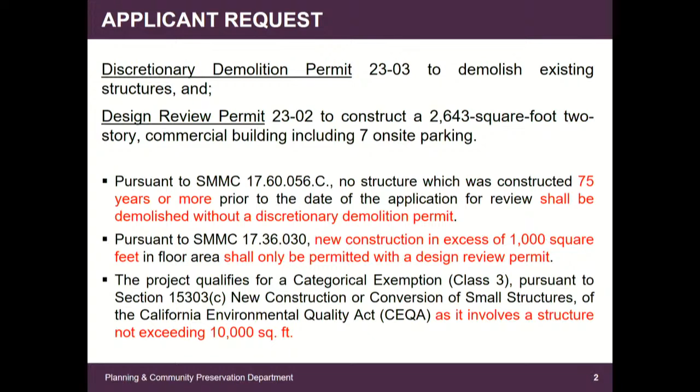The applicant is requesting a discretionary demolition permit, which is required by Sierra Madre Municipal Code for any building that's 75 years of age or more, and so we are processing that discretionary demolition permit. They're also applying for a design review permit, which is also required for any new construction in excess of 1,000 square feet. And the project is also categorically exempt from CEQA, as it involves a structure not exceeding 10,000 square feet in size.

The property is zoned commercial as well as its land use designation. Fairly small lot, 7,500 square feet, built in 1933. The building is 90 years of age, and we required a historic resources report to be prepared.

Under criterion B, architecture, it is not eligible for designation. It's not a significant building. Under criterion A, which is historic, it is eligible for designation.

In the conditions of approval, we are requesting that a plaque be placed at the project site and the historic resources report placed in the library archives. The reason it's culturally significant is its association with Dr. William Groth, who was one of the first physicians in Sierra Madre and actually opened up the first hospital in Sierra Madre, just north of the site.

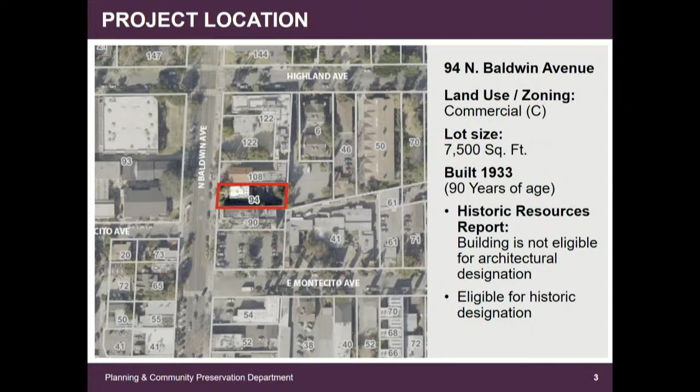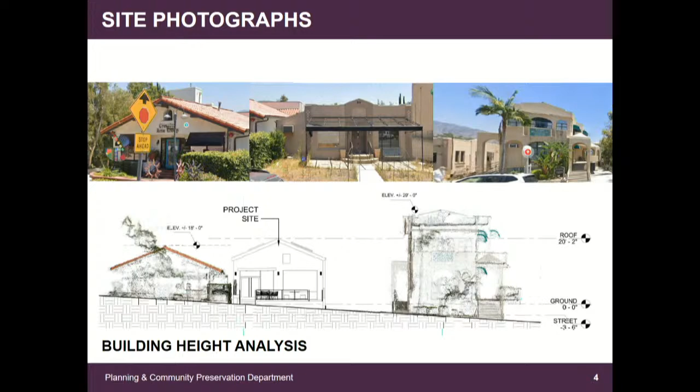Again, looking at neighborhood proximity, we have the Bethany Church and the school across the street. At the corner of Baldwin Avenue and East Highland Avenue is the Frontier communication structure. And then immediately to the south of the project, again, that two-story commercial building.

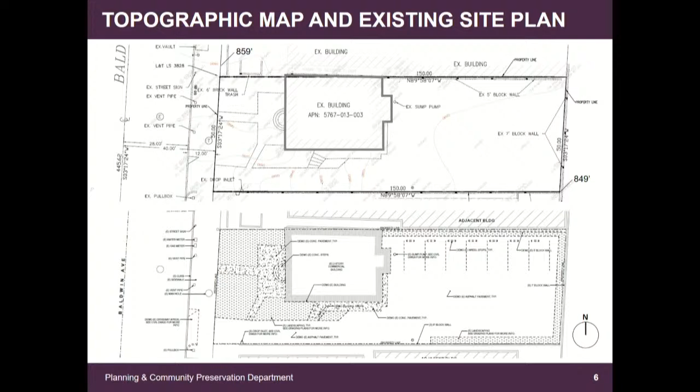We are looking at a topographic map of the existing site, which will be demolished in its entirety, and reconfiguration of the parking lot, which provides 7 parking spaces.

The broad project data identifies the various zoning requirements, and it meets code in its entirety, including lot size, really with no change. Lot coverage increased slightly by 8% to 39%. The code does allow lot coverage at 80%. The floor area, comparing the old building to the new, increased slightly at 287 square feet - so minimal increase in size.

Setbacks: the front setback increased slightly to accommodate outdoor patio dining at the street front. To the north side, it's built to the property line as was existing. To the south, it increased slightly to 21 feet, largely to accommodate the requirement for fire access of that driveway, a 20-foot minimum requirement. The rear setback went from 74 feet to 15 feet, which is still code compliant, and they're providing the required 7 parking spaces, including 1 handicap accessible space.

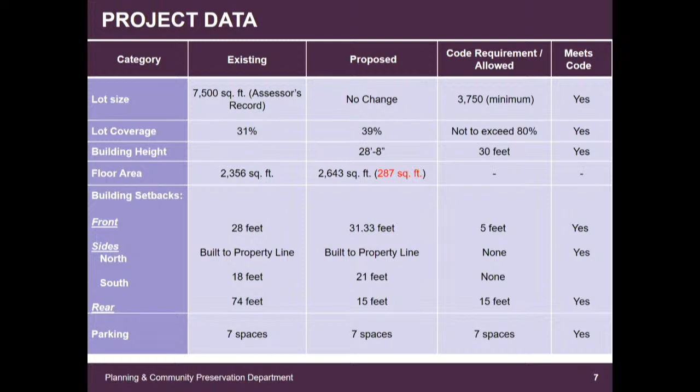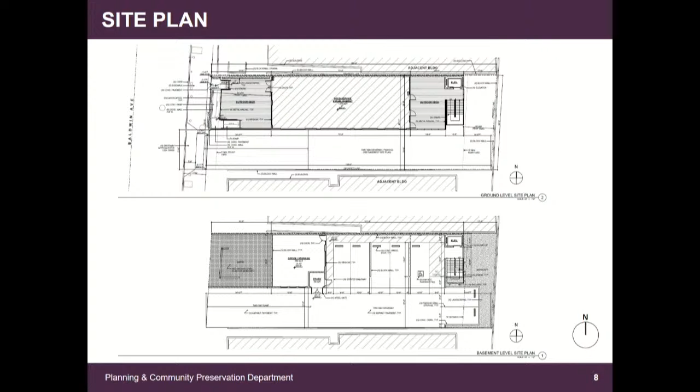You see the handicap accessible space right here, and the path of travel and the elevator. And there you see the 20-foot wide driveway. There's also a small program of basement and storage space underneath the building.

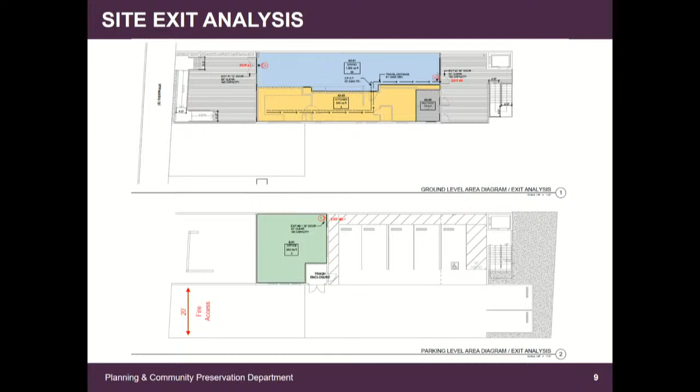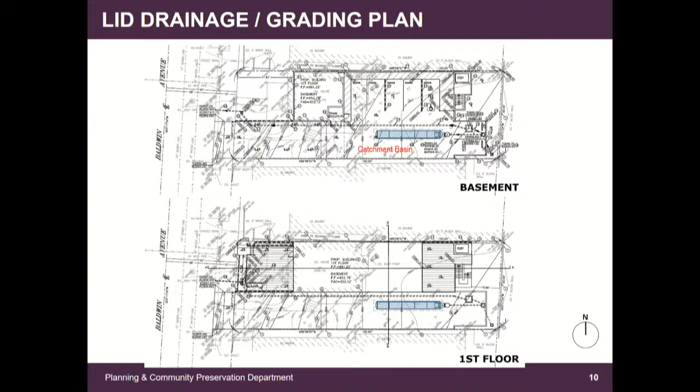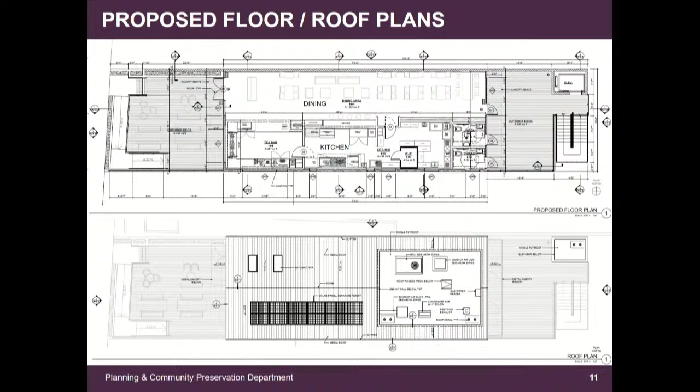The floor plan and roof plan. The floor plan on top shows the outdoor spaces, front and rear, and the interior program, which has seating and dining opportunities across the north side of the building. There are skylights, as you can see in the roof plan, and solar panels. The kitchen program is all located to the south of the building footprint.

Street facing elevation, or the west elevation, as shown, and its proximity to the adjacent buildings. Similar style in reference to the gable roof, the outdoor patio and access ramp that leads into the building.

And then on the north facing, here's a street front. So this is the south facing elevation, the driveway, and that's a container area for the trash receptacles, which closes with gates. And then these are the parking spaces below the building, and alongside here you see the stairs accessing the rear deck.

AC equipment, mechanical equipment is concealed behind the gable roof and this parapet gable to conceal a lot of the mechanical equipment in that location.

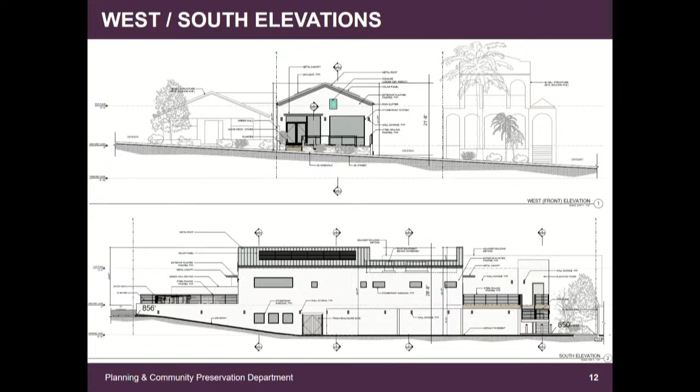The east elevation showing the access ramp up to the deck, and then the north elevation adjacent to the Creative Arts Building. Again, we're looking at street front here, and all the way back here is the rear deck.

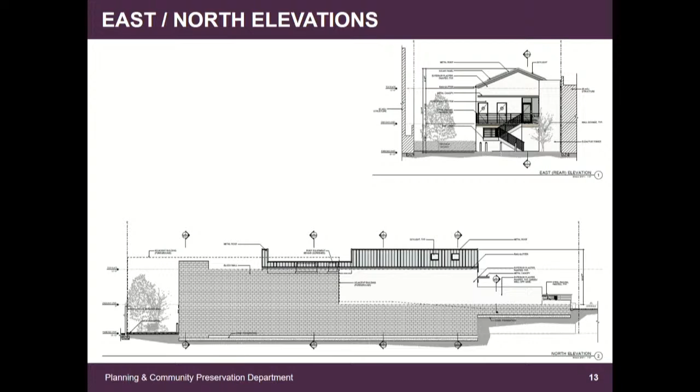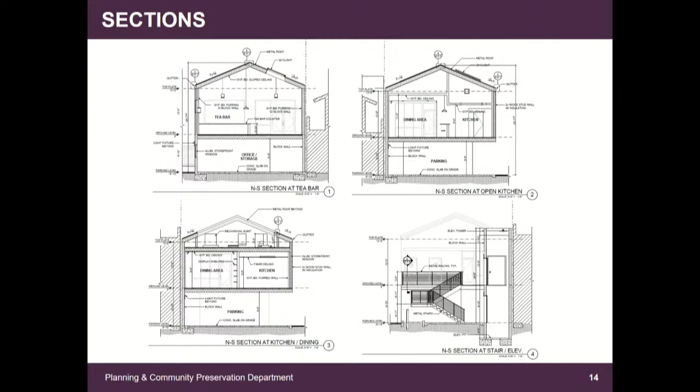Sections of the project, and longitudinal sections. Again, looking at street elevation to rear elevation.

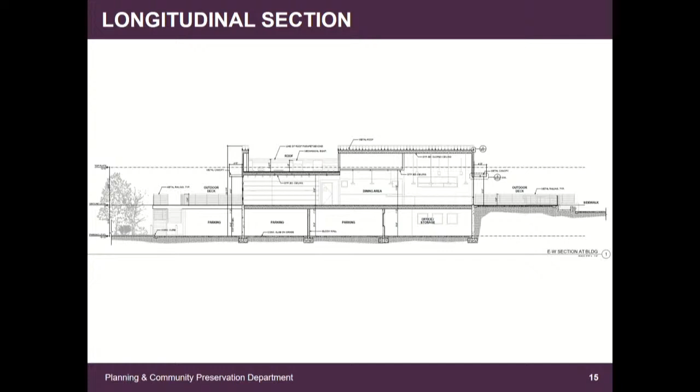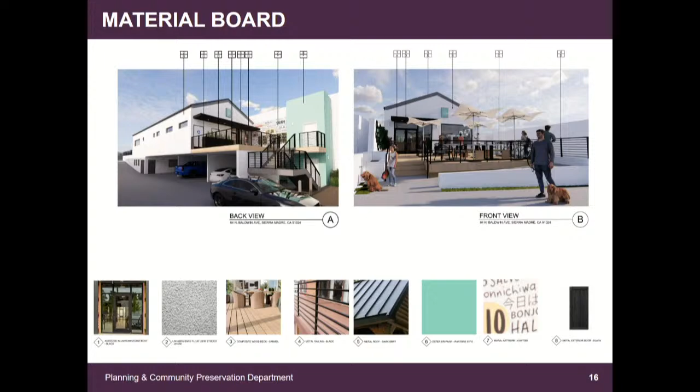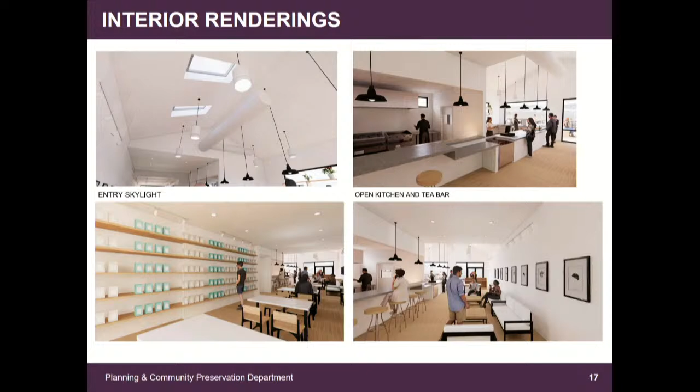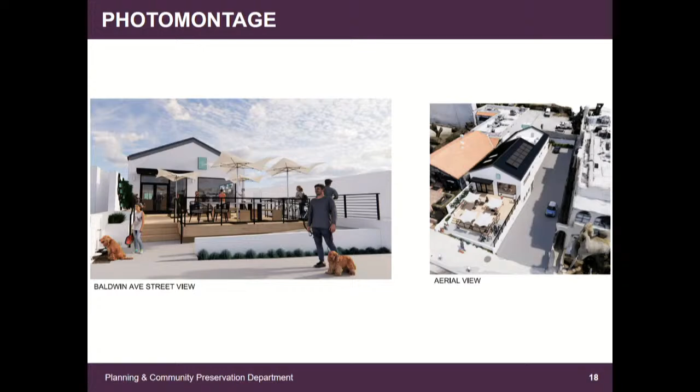Street elevation and aerial view. And additional photo montage. Again, tea room, restaurant, gallery.

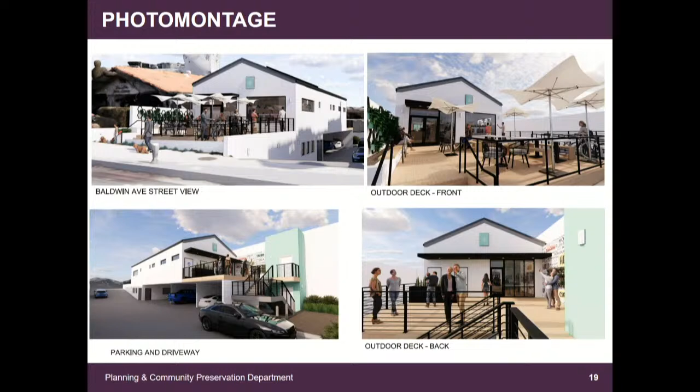So the Planning Commission is required to make findings not only for the design review permit, but also for the discretionary demolition permit. This is a summary of those findings. Staff has found that the project is not eligible for local, state, or national historic significance under criterion B, architectural. However, the site is significant under criterion A, historic.

A commemorative plaque shall be installed at the site, stating that the property was originally owned by Dr. George W. Groth, a person of significance in the local history of Sierra Madre. The project will also comply with requirements for demolition, including limitation to construction hours and recycling of materials and so forth.

It also complies with the objectives of the general plan specific to commercial uses regarding activation of street and offering other uses at the site, such as encouraging restaurants and so forth. And also, the project will meet all the requirements of the building code, fire code, and the city zoning code.

The design review findings summary. Again, under the objectives and policies of the general plan, which does encourage developing new commercial structures, encourages the development of restaurants, and also businesses that attract visitors to the downtown area. The replacement project is compliant with all required setbacks, and the project utilized the existing landform to create a single-story appearance on the street front elevation.

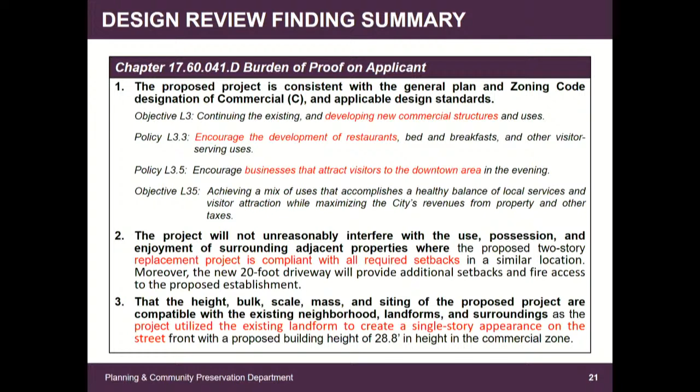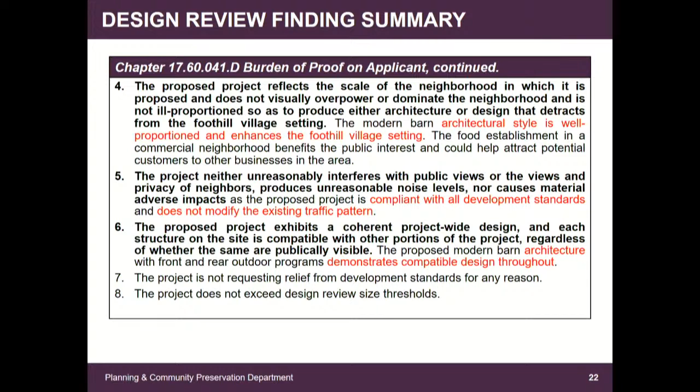Continuing on with the design review summary findings, the architectural style is well proportioned and enhances the Foothill Village setting. It is compliant with all development standards and does not modify the existing traffic pattern. And the architecture demonstrates a compatible design throughout all building elevations.

The alternatives before the Planning Commission this evening is to approve the application for discretionary demolition permit and design review permit. You can also modify the applications with any critique that you might want to impose. You can deny the request, but citing the findings why you feel the project should be rejected based on the findings, or you can continue it to a date certain. Staff is recommending that the project be approved, both for the discretionary demolition permit and design review permit. That concludes my presentation. If you have any questions, I'll be happy to answer them.

What happens to the water in the catchment basin? So in any catchment basin, it all percolates through the ground, but if it was about to overflow, then it triggers a pump and that gets pumped into the street. That would be true for any catchment basin project throughout the city. It's usually a perforated pipe, right? Yes, that has holes in the bottom. Okay, yeah, there's a big one under Kirsten Court now. Yeah, you weren't there when they dug the hole.

It's a big one at my house.

All right, and did the applicant want— yes, the applicant is here, and if they wanted to add to the presentation or answer any questions. Does anybody have questions for staff before we check with the applicant?

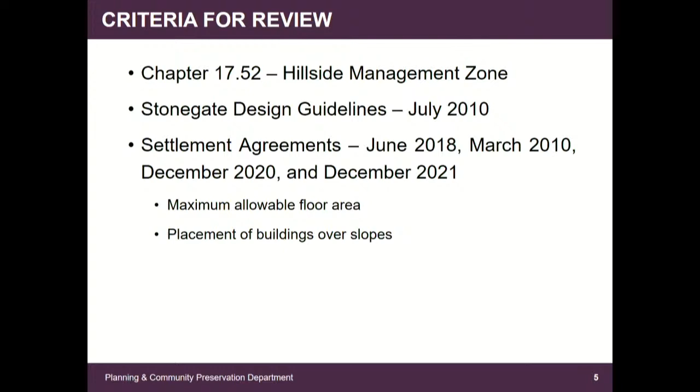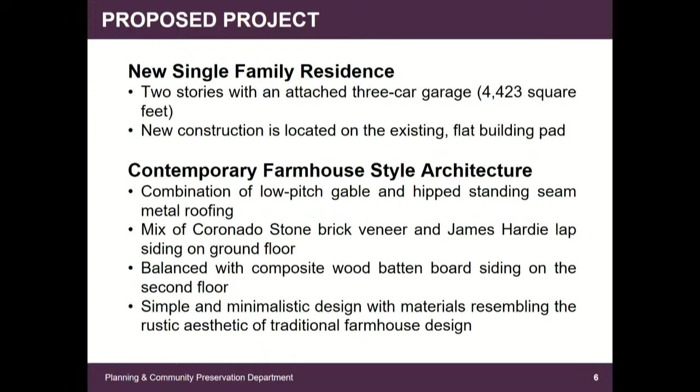The proposed project is, as stated earlier, a new single-family residence, a 2-story house with an attached 3-car garage totaling 4,423 square feet on an existing building pad. It is designed in a contemporary farmhouse architectural style, combining low-pitched gable and hipped standing seam metal roofing, a mix of Coronado stone brick veneer and James Hardie lap siding on the ground floor, balanced with composite wood batten board siding on the second floor. Overall, it's a simple, minimalistic design with materials resembling the rustic aesthetic of traditional farmhouse design.

How long are permits good for once they're approved? Once a permit is issued, it's good for 1 year. Once ground has been broken, there's a 180-day timeline in which they need an inspection to show significant progress on construction. We're well past that since Lot 25 was approved. Since Lot 25 has an issued building permit, I believe they were granted extensions on their approved building plans. I don't have the exact dates of when it was issued, but I believe it was within the last year or two.

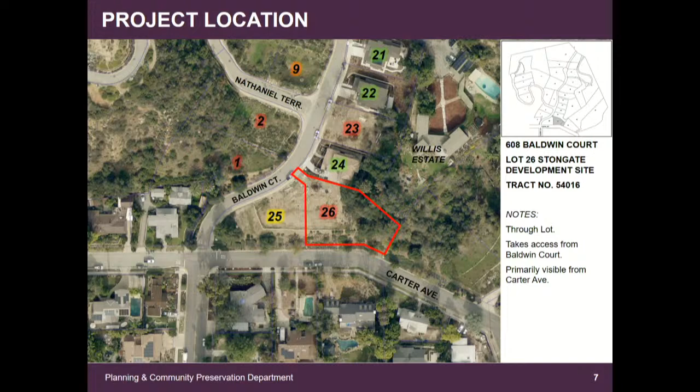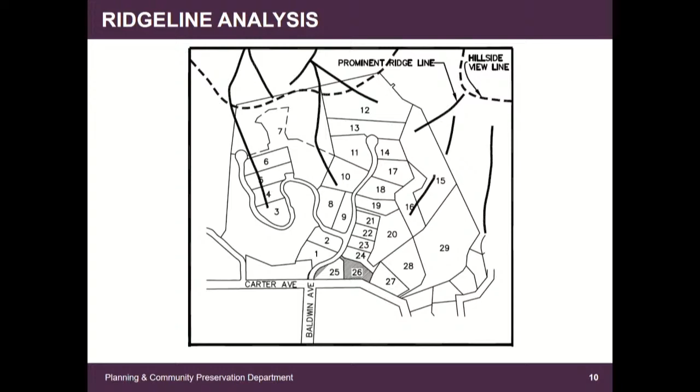Moving on to the slope study, the existing site's building pad is primarily within slope category 1, of less than 15% slope. However, there are areas within the front portion of the lot, necessary for access, which are within slope category 4 of greater than 25%, requiring grading in a gentle slope that accommodates vehicular access to the proposed building pad.

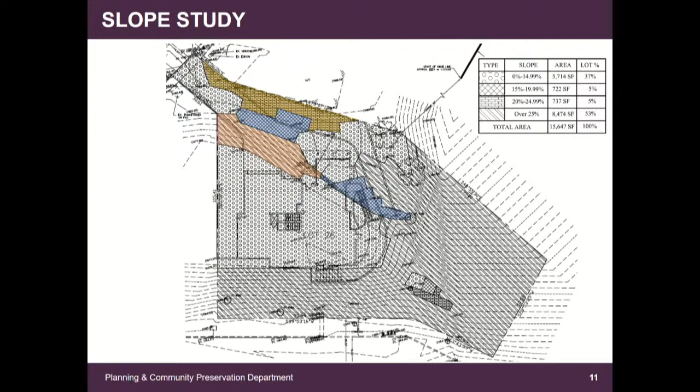On the following slide, I've highlighted in orange where the grading will take place. The driveway will create a gentle grade, I think about 4%, into and toward the garage located on the building pad. There are a series of retaining walls on either side of the driveway and also along the northern property line, which do adjoin at some point. However, upon the property line walls, there will be a fence installed as well for privacy. Within these two retaining walls is a 2-to-1 cut slope.

I also have demonstrated here the drainage plan, indicated and highlighted in blue. There is an underground system of perforated subdrain pipes, catch basins, and PVC drainage pipes that lead into an infiltration basin at the southeast corner of the house, which is underground by 7 feet. That infiltration pit does overflow into an existing culvert in the parkway.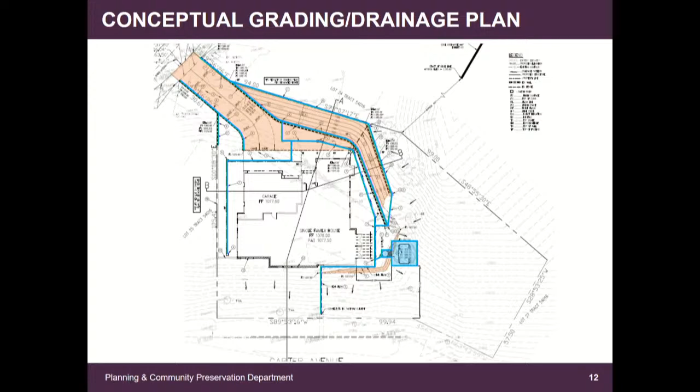The estimated grading start date is December 1st, 2023, and it's estimated to take 1 year to complete the grading, which consists of approximately 100 cubic yards of cut and fill to the existing pad.

Regarding protected trees, there are 6 coast live oaks and 1 California sycamore. I think I have misrepresented some of the protected trees here - I don't believe every highlighted one is a protected species. These 2 smaller ones I don't believe are protected trees. But the ones that do have bias towards the footprint are coast live oak trees, and the sycamore trees at the lower west corner of the property.

According to the arborist, it is possible to construct the project without impacting or removing any of the protected trees. Because there are 2 oak trees that demonstrate a bias towards the footprint of the proposed project, it is recommended that excavation and trenching within the tree protection zone be conducted under the supervision of an ISA certified arborist, which may require hand digging for footings. Recommendations of the arborist are incorporated as part of the conditions of approval for this project.

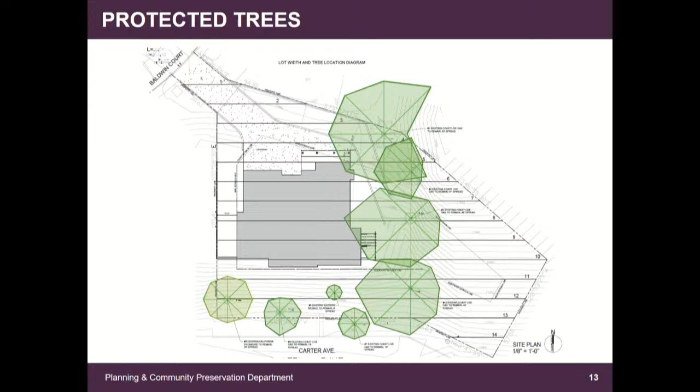As you'll also see on this slide, an analysis was conducted of the average lot width, resulting in 107.23 feet, which would require a cumulative side yard setback of 32 feet 2 inches. The following slide shows the conceptual site plan with setback lines shown. From the front on Baldwin Court, there is a front yard setback of 32 feet 7 inches.

There is a secondary front yard setback that staff is requiring from Carter Avenue. The minimum required is 25, but 26 is provided. For the side yard setback, the smallest one adjacent to lot 25 is a 10-foot setback, which is the minimum that can be required on the smallest side. On the opposing side is 22 feet 2 inches, providing a cumulative side yard setback of 32 feet 2 inches. You'll also notice a front porch projecting into that setback, which encroaches not more than 6 feet.

The garage openings are recessed from the main building by 12 inches, and the front entry incorporates the same 12-inch recessed feature. The garage is stepped back, in addition to the side yard setback, by an additional 3 feet 6 inches to reduce its presence from the street. So this project will have a nice presence on Carter Avenue. The garage, because it is oriented such that it is lower from the street on Baldwin Court, won't have as primary a presence as it might otherwise.

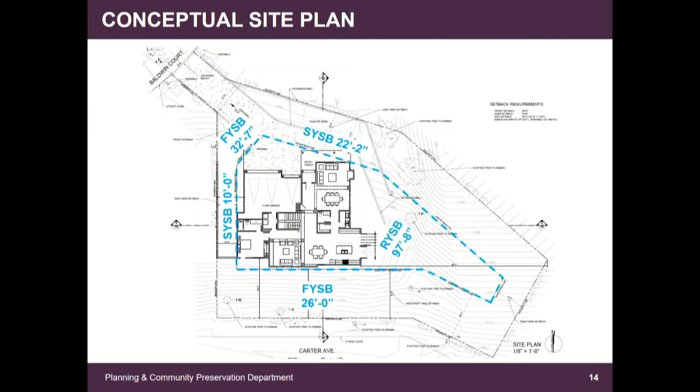For the conceptual landscape plan, the Stonegate design guidelines include a recommended plant palette with trees, shrubs, vines, ground cover, and perennials for properties located in the tract. The proposed landscape plan is consistent with the recommended plants described in Appendix A of the Stonegate design guidelines.

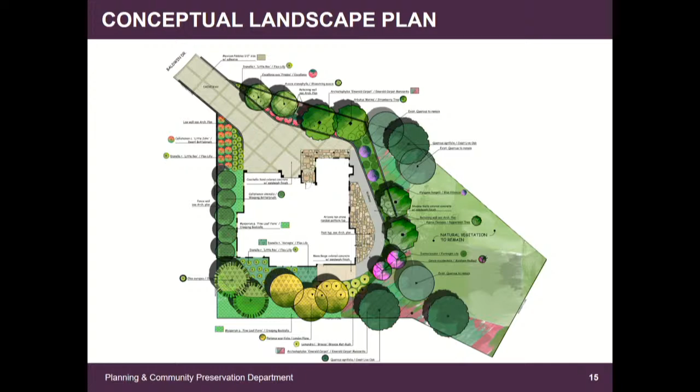The floor plan program: the first floor includes the 3-car garage, family, living, dining, and laundry rooms, a kitchen with an auxiliary interior fry kitchen, a breakfast nook, a powder room, and an ensuite bedroom. The kitchen opens eastward to an open patio area. The total area for the first floor is 2,204 square feet of residential area, plus the 669 square foot garage.

The second floor includes the primary bedroom with generous space for 2 walk-in closets and a bathroom, 1 ensuite bedroom, 2 additional bedrooms, and a full bathroom. The stair lands at a generous open interior space with an attached hallway ending at a small storage closet. The massing of the second floor is stepped back from the building line of the first floor on each side, with a greater step back on the north and west sides. The total area of the second floor is 1,550 square feet.

A commissioner asked what the setback is between the first and second floor on the south elevation, wondering if it's about half a foot. The presenter clarified it wasn't indicated directly: it meets at a corner, where the outer corner of the south elevation meets the interior corner of the building line, so it's barely visible. Highlighting the family room's exterior wall on the slide, the presenter explained that it is stepped back approximately 6 feet from the building line of the first floor on the south elevation, as Commissioner Denson indicated. Another commissioner noted the plans didn't look like it was 6 feet, and the presenter agreed but confirmed that is the step back.

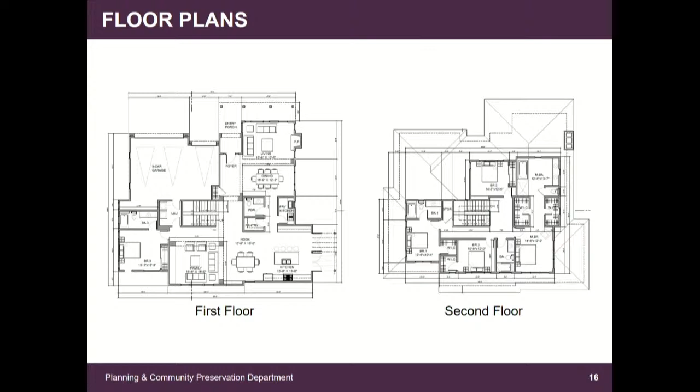Roof plans are all of a consistent low pitch featuring crossing gables and hipped projections. The front porch is covered by a hip roof extending from the living room, and the rear patio features a trellis covering projected from the hip roof on the east side. The lines extending to the eaves are shown, and the dash lines represent the building line, the wall lines of each floor. Again, there is a point where the interior corner on the south elevation meets the exterior corner of the second floor on the south elevation, which the presenter approximated as about 6 feet separated, having eyeballed it.

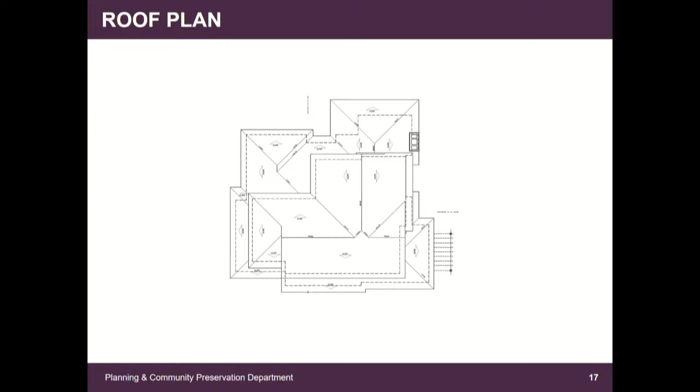On the materials: charcoal color standing seam metal roofing, Arctic white composite wood siding, vertical batten board cladding on the second floor, and horizontal lap siding on the ground floor. A wolf gray Coronado stone veneer is used at the ground floor and cladding the chimney, with a steel gray for the window and door trim.

Wood columns and trellis will be compliant with the very high fire hazard severity zone building requirements. Structural members will be a minimum of 4-inch thickness and will be painted to match the Arctic white field color of the home. The proposed home is within the established building envelope described by the height of 25 feet, the warped ground plane, and the angle plane, as highlighted here in red and orange.

And moving on to the south and north elevations, north being the front of the property and south being the Carter Avenue present. Windows are featured in a combination of single hung with casement windows, and include standalone and coupled single hung windows, as well as smaller sliding windows for privacy in the bathrooms.

Vents are featured below gables and presented as louvered vents, but will include screening necessary for fire protection as required by Chapter 7A of the Building Code. Those vents are below the peaks of each gable.

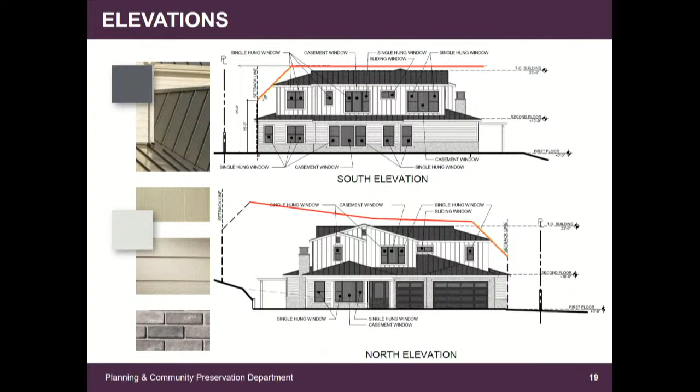In a summary of the project data, each point here is compliant with either the settlement agreement or the municipal code. In particular, the lot size complies with section 5.2 of the settlement agreement, and the gross floor area complies with the settlement agreement as described in Exhibit H.

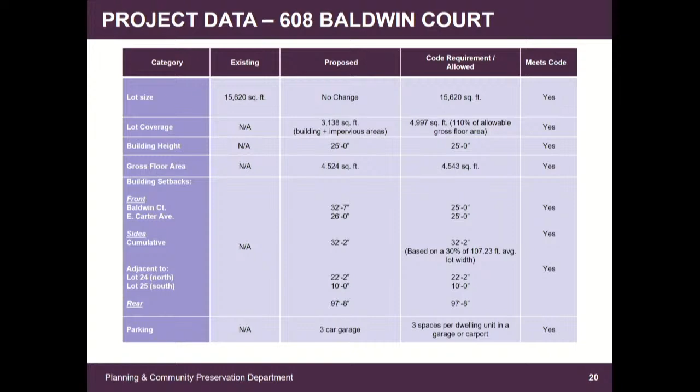A neighborhood analysis was conducted and revealed that the proposed residential floor area, totaling 3,754 square feet, is greater than the average of the top third of homes in the vicinity by 84 square feet. However, I would like to point out that the analysis includes 62 East Carter, reflecting a building area of 1,128 square feet.

That does not reflect the approved project that adds 2,330 square feet to it. It is pending a final building inspection for that to be reflected in the assessor's records. I did count that in the event that this project at 62 Carter is assumed, the proposed project at 608 Baldwin Court would be less than the average of the top third by 45 square feet. This analysis also does not consider the complete construction at the other sites of lots 24, 22, and 21.

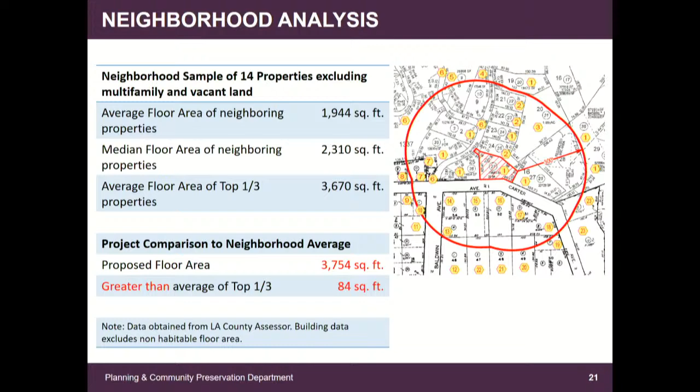On the following slide, we have the massing study. The massing of the proposed home is outlined by the white rectangle. Massings of other homes in the development site have been included.

It's important to note that the nearest adjacent property, lot 25, is not yet constructed but has been approved for construction as previously stated. The massings for lot 1 and 2, located on the west side of Baldwin Court, are also present on the slide, but are pending entitlement and may be subject to change. The massing of lot 24 is shown at the north, is north of the proposed project, and is already a constructed project, so its massing represents its existing state.

So on the top left image here, north is kind of facing the left side of that image. You see lot 24's massing here is already constructed, and lot 25 is proposed - I'm sorry, it's entitled but not yet constructed. Then lots 1 and 2 are on the south and west sides, which are both on the west side of Baldwin Court.

Is 25 the actual, what it's gonna look like? I mean, that was approved? Yes, lot 25 actually looks like that. Lot 25 is entitled, approved for construction, with a building permit issued, but no ground broken yet. Right, but it looks like that. Yes, okay, correct, yes.

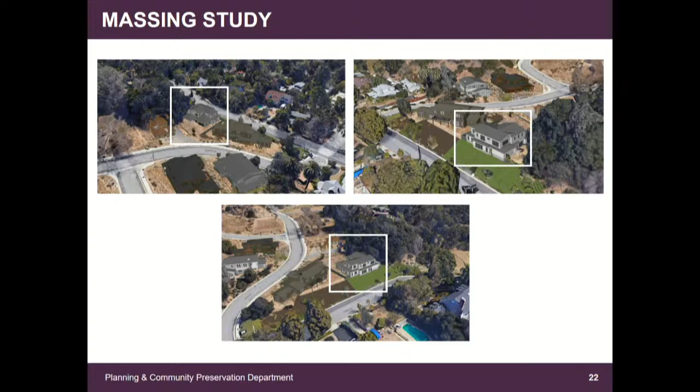And the following, we have a 3D rendering of the project as seen from Baldwin Court. You'll notice that the property line walls here are going to be proposed in the same stone veneer that you see throughout the development.

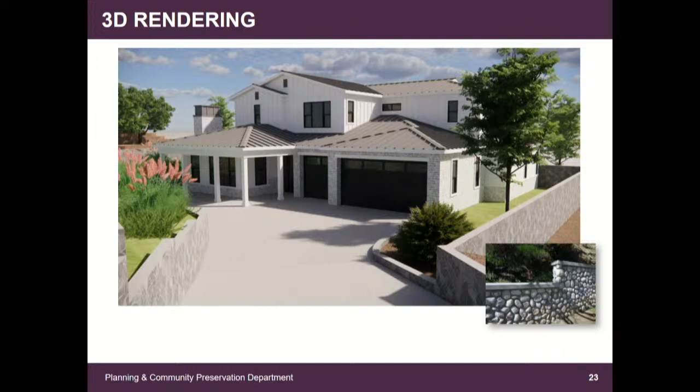In part for approving this application, findings for the hillside development permit are summarized here on the slide. First, it is consistent with the general plan for single-family residential use. It does meet all zoning regulations for height, setback, and parking. The new construction is on an existing flat building pad. The project does not impact ridgeline views. The development will comply with the fuel modification plan, and there is use of earth tone colors throughout.

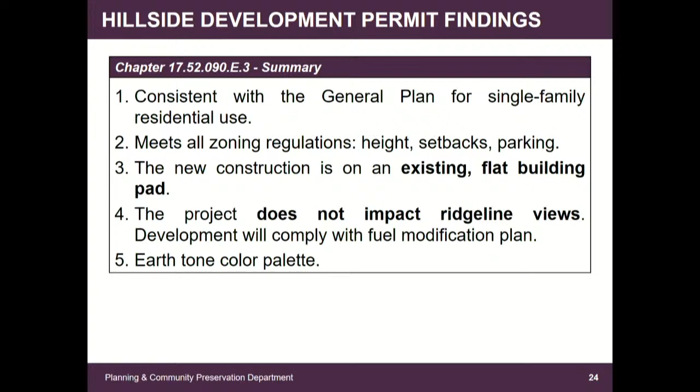As a reminder, the conditional use permit is necessary for differentiation of the historic sites in the development. The first finding is that the new house is differentiated from the existing historic structure, as it is a contemporary farmhouse design. Baldwin Court provides sufficient access for circulation for single-family development. The single-family use is consistent with other single-family developments within the vicinity. The lot was created for the development of a single-family residence, and the project meets all requirements of the zoning code and the intent of the general plan.

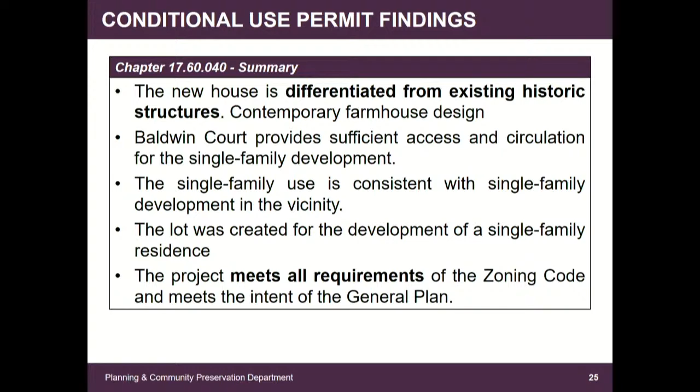Primarily, differentiation from existing historic structures is backed up by support through a design compliance review conducted by Sapphos Environmental.

On the following slide is compliance for Stonegate design guidelines. In summary, the custom architectural design responds to the site conditions. The mass and bulk are reduced with breaks in wall plane, roof variations, architectural projections, and an open patio. There is a variety of window sizes and configurations to enhance visual interest. The materials are durable and low maintenance, with a metal roof and wood siding. The landscape plan is water efficient and is an integral component to the project design.

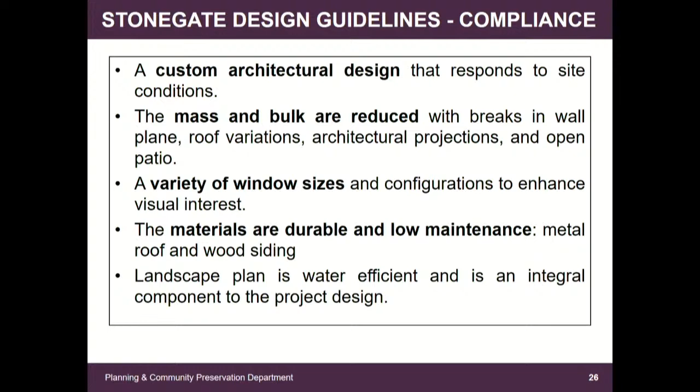The alternatives before the Planning Commission tonight are to approve the applications as presented, subject to the conditions of approval pursuant to Planning Commission Resolution 23-10. The Planning Commission may approve the applications with modifications, which may include adjustments to the form, massing, fenestration, materials, and colors appropriate to make adequate findings on the applications. The Commission may deny the request, identifying findings that it feels cannot be made and the basis for rejecting those findings. Or the Commission may continue the subject project and provide direction to the applicant and to staff.

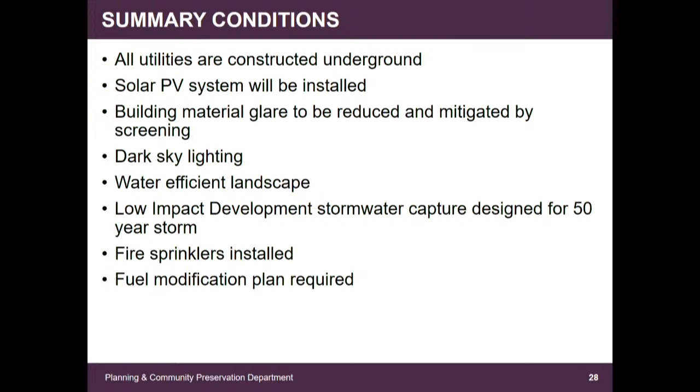A summary of the conditions include that the project have all utilities constructed underground, that a solar PV system be installed, that building material glare be reduced and mitigated by screening, that all exterior lighting be dark sky compliant, that all landscape be water efficient, that the low impact development stormwater capture be designed for a 50-year storm, that fire sprinklers be installed, and that a fuel modification plan be required as part of approval.

Staff's recommendation is to approve the applications as submitted pursuant to Planning Commission Resolution 23-10. That concludes my presentation.

Thank you. Any questions for staff?

Is the wall between 25 and 26 a retaining wall, a partial retaining wall? It's a retaining wall for purposes of grading, but it will include a privacy fence on top as well. How high is that? It's not indicated. It will be part of the deferred submittal, because it's going to be dependent on the next house that's built too. Correct, yeah, it is subject to a height limit of 6 feet.

But the pad level was the same, right? I mean, I was up there today. It's basically like one giant wall. Yeah, I was thinking about the barriers to privacy versus, we had some things with the other properties going up about wildlife corridors and obstructions to movement. But I think since it's going between the buildings, it meets the requirements. Anyway, I just wanted to know because it's hard to tell. It looks like a decent big wall, but it looks like there are some retaining features to it.